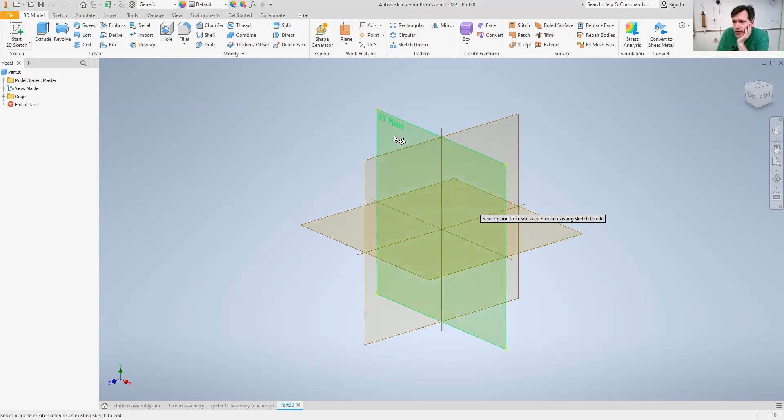All right, so you're going to have, we're just going to do the side walls of this part. Actually, no, let's just do one side for now. Let's do one side, and then I'll make another one for front sides.

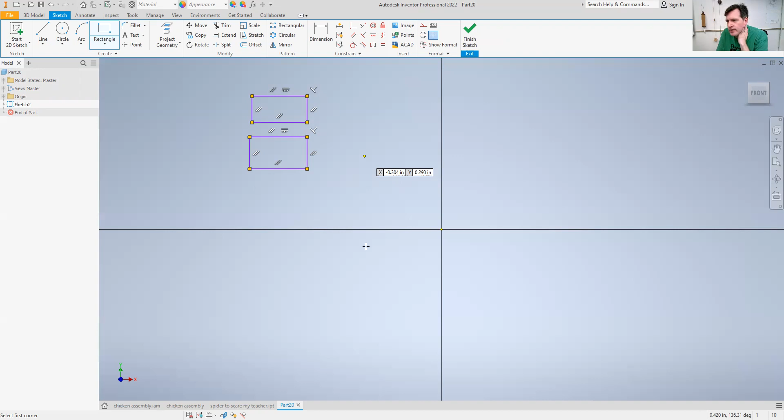Little hinges that are going to attach to little spots for hinges right there.

So what we're going to make first is this piece right here, which incidentally is also this piece right here. You'll have to make two of them if you want a different design on each one, but if you want just one design, you just make one.

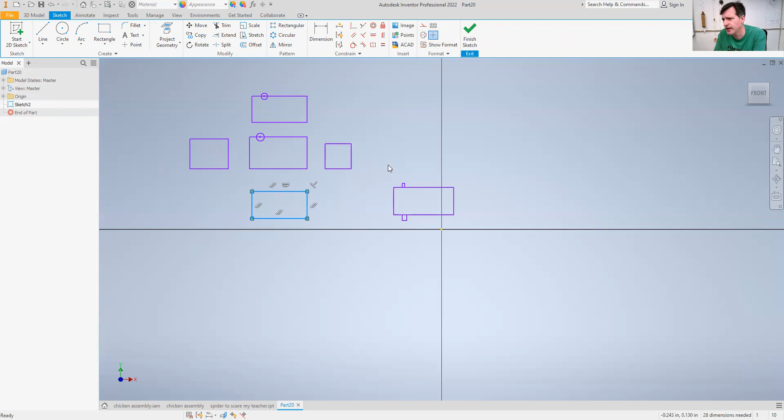And then we'll make another video for this one here and this one here, and another video for this, and another video for this. All right, so making this video first.

Get rid of these. First thing we're going to have to do on all of these parts is make a rectangle that is 4 inches by 3 inches. Regardless of the part you are making, you need to make this rectangle first. Now, it doesn't need to stay a rectangle. In fact, it'll probably be easier if it doesn't.

I go through and delete two of the walls. That's fine. What this does is makes it so that when I export it through Adobe Illustrator, it keeps the sizes because I can't translate it directly. We need to keep that. So the size of the wall here is going to be 3 inches by 2 inches.

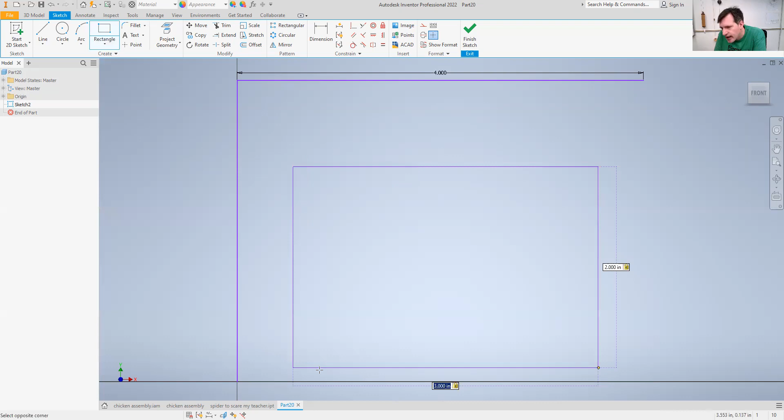This size is chosen because it's the largest size box that I can fit on one piece. Now, I notice it's getting a little low here. Probably fine, I'll just move it a little bit closer.

Everything in your drawing needs to be within here or it'll mess up the scaling of your part. So even if it's just a drawing, like some GIF or JPEG that you're tracing, it needs to stay within this box area, or else it'll mess up the scaling and then things won't fit.

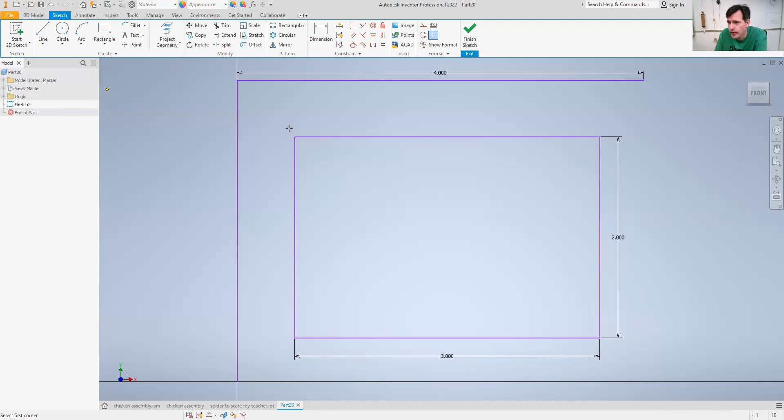For this one, I am going to make a little tab here. This little tab can be 1/8 deep. Oh, I didn't mean to. So let's put in a dimension, 1/4 of an inch long. And I'm going to have a notch here, and then another tab.

These tabs and notches are called finger joints, because when they go together, it is like fingers meshing with each other. They are also called box joints, which is convenient because we are using them to make a box.

Now, that's how big we want them to actually be in real life. However, the laser is going to cut out a little bit. And if we cut out the little fingers just like this, they're not going to work. They're going to be too loose. The box is going to fall apart.

You could glue it together, but that'll look messy. And we don't have to, because we can just prep. I have run some tests and I know how much the laser takes out. The amount the wood laser takes out, incidentally, is called kerf. We have to calculate the kerf. The kerf is 1/80th of an inch.

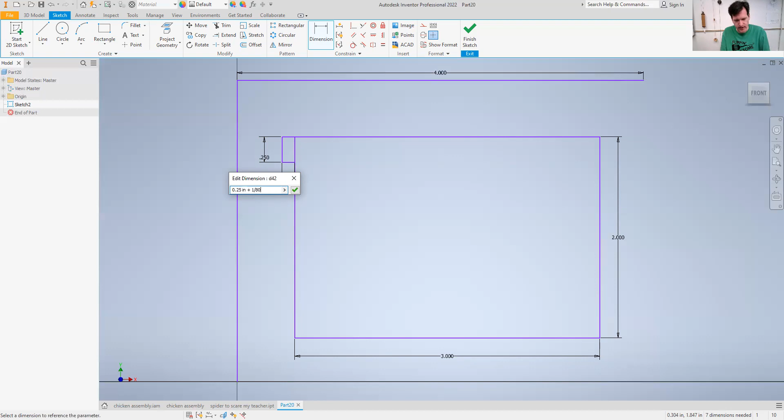So for these that need to be a little bit larger, I am going to do plus 1/80, maybe get a little bit bigger. And this is going to be 1/8 of an inch plus 1/80. Note this is 1/8 of an inch because the thickness of the wood is 1/8 of an inch, 1/8 inch plywood, so it lines up with the edge.

I'm going to put an extra 1/80th of an inch so that this lines up with a 1/4 inch hole. I'm putting in an extra 1/80th of an inch. And then I am going to duplicate it with a rectangular pattern.

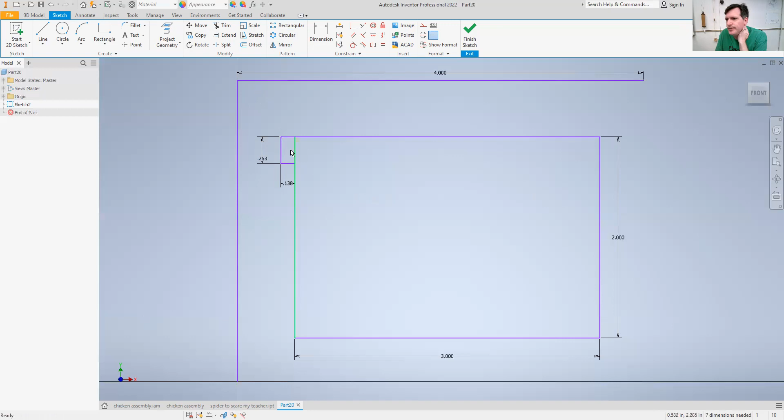I'm going to cancel here because I don't want to do that third or fourth side. I'll just click, click, click. I'm going to select a dimension, and I don't want it to go up, I want it to go down. I want 4 of them, and between the start of this one and the start of the next one, I want it to be 1/2 inch, because they're 1/4 inch fingers. So 1/2 inch. And if I hit OK, it's not going to work.

I'll show you why, then I'm going to redo it. I'm going to try to trim out, and I can totally trim there—well, except for that, it's part of a box. I try to trim there and nothing happens. And if you remember from your very first Inventor assignment, there's something more I've got to do. Try it again.

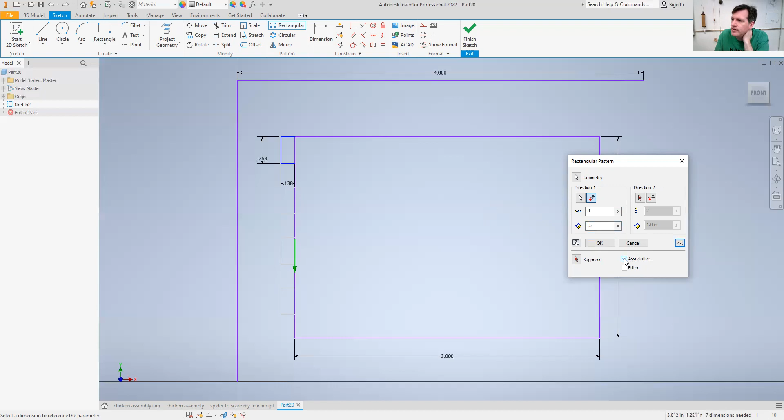Exact same, we got 4, we got 1/2 inch. I'm going to go to these here and remove associative, because it's a feature, not a bug, why it doesn't let me trim. Trim, trim, trim. It's probably still going to complain. Yeah, so 8, I think it is.

I'm just going to draw back in. All right, there we go. And I can do it on the other side. I could also use a mirror if I wanted to, but I'm not going to because it's not that much. So it's 1/8 of an inch plus 1/80th of an inch. And I still forgot this side. So it is exactly that because it lined up with that one, I believe.

I'll just type it in just to make sure—1/4 plus 1/80th. And hey, it doesn't change at all, because it was lined up with that one.

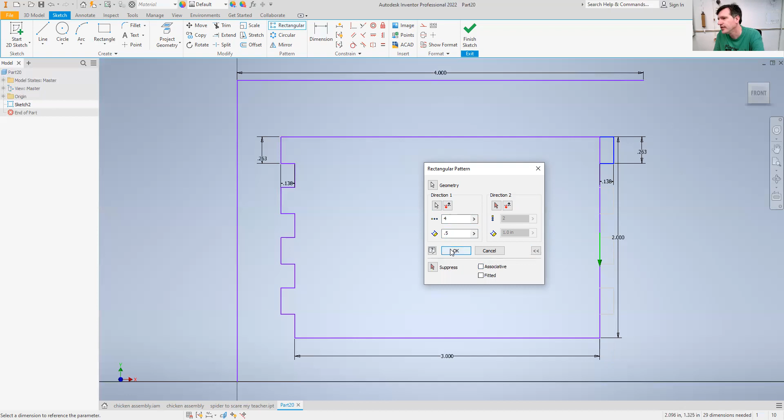And then we do the rectangular pattern again. We say this one, this one, this one, we pick that, we do 4. I don't even need to change the direction because it's already going down. We go to .5. We don't forget associative.

We trim what we can trim, get rid of the lines that are going to cause us grief. We just draw that one back in. Now, at this point, there's no difference from a long box and a short one.

I actually know I'm going to do one thing more. We're going to have to put a base in eventually, and we're going to have to put holes so the base fits—these are going to be a different kind of joint. I believe this other joint that we're going to have is called a pin joint or a tenon joint. Tenon joint—look that up.

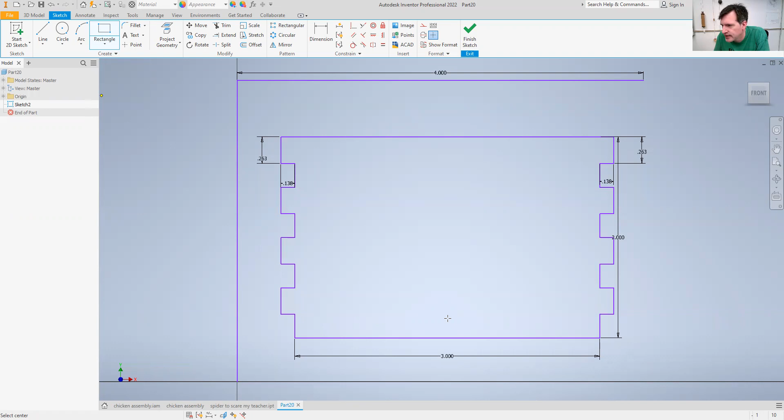All right, so the hole for it is going to be here. We're going to make the pins in the base. I'm going to change this to a center point rectangle. I'm going to put it randomly there so it's not lining up with anything. And I'm going to actually position this first after I size it. This one I'm going to want to have at exactly a quarter of an inch.

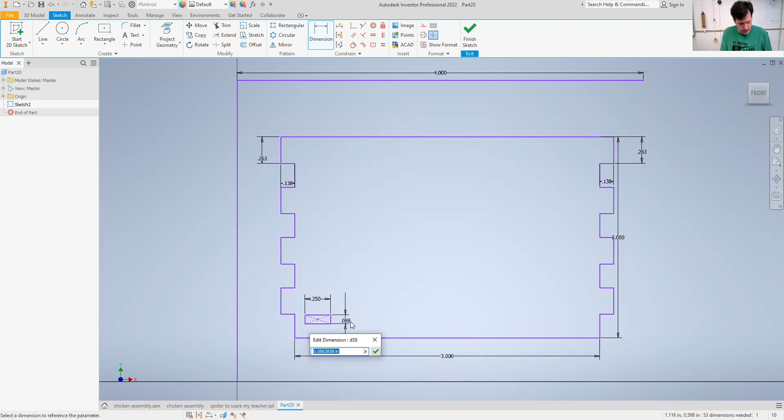Exactly an eighth of an inch. And I want to put the distance between here and here at 1/8. This is between here and here, 1/8. It doesn't matter, you can have it at a different position, it just needs to be consistent. And I need to make sure weird things didn't happen, because it looks like they did.

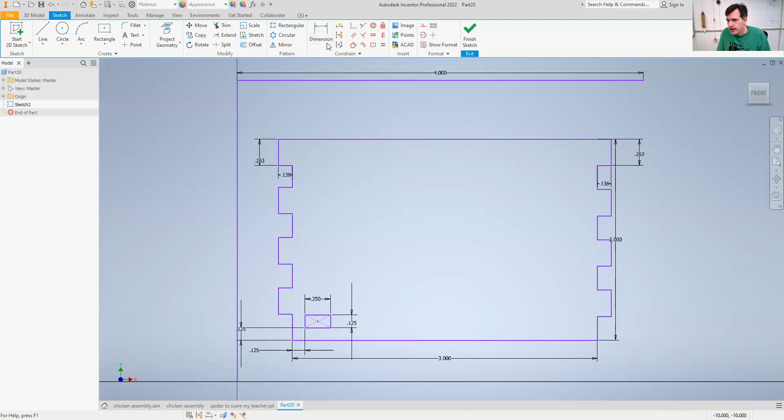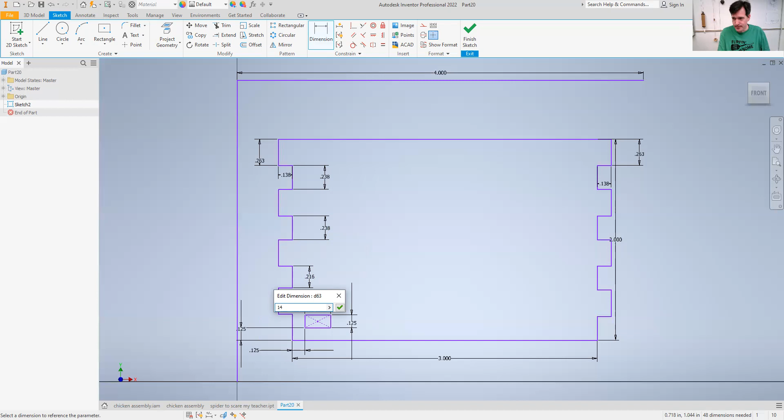Here, that is not the right size. It should be 1/4 minus 1/80th. And should this be 1/4 minus 1/80th? And should this be 1/4 minus 1/80th?

And should this one—which it looks like it is now—just make sure these ones on the other side didn't get messed up too. It should be the same. All right, there we go. It is positioned and it didn't mess up our finger joints, or we fix it.

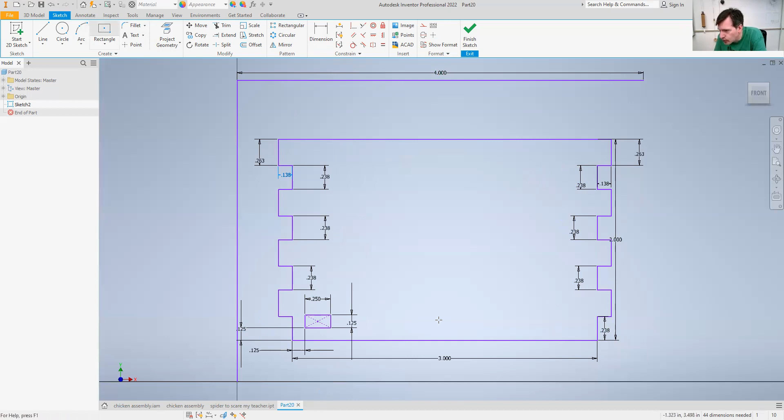And I'm going to need one that is in the center. Line it up with the center point there, and the center point there. And this should be in the right spot.

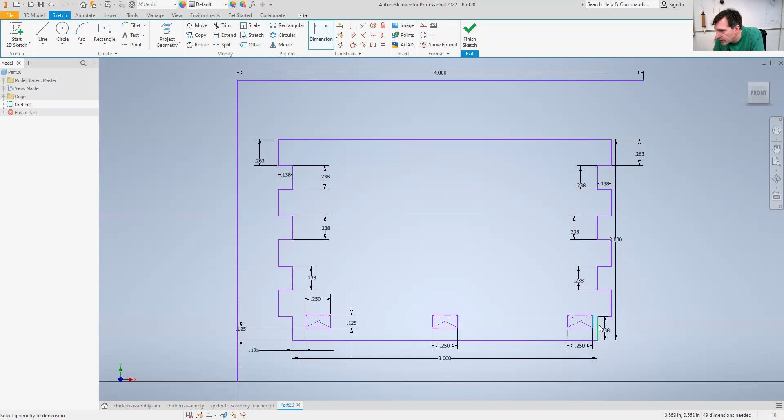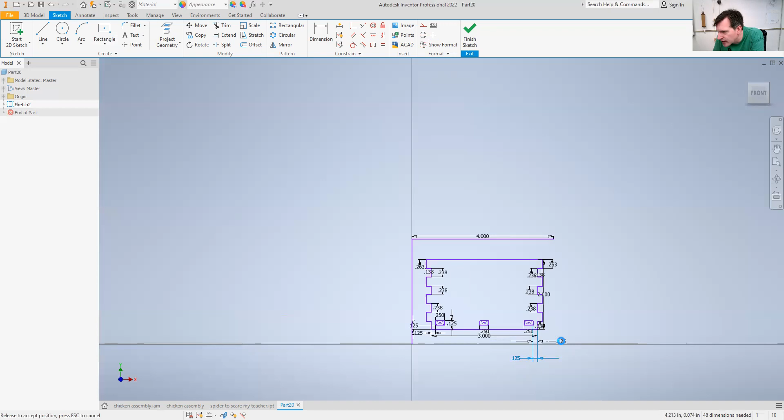Now, dimensions can technically be outside that range, but I'm going to move it back in just to make sure I'm careful and nothing is outside this box here. So now we get to figure out the difference between the length and width.

I am going to make a box which is 1/8 of an inch by 1/8 of an inch, which is going to be for a pin hinge, basically. It's going to line up at the top. Let's go, it's going to start from here, but it's going to go over 1/8 of an inch. It's going to line up with this hole right here.

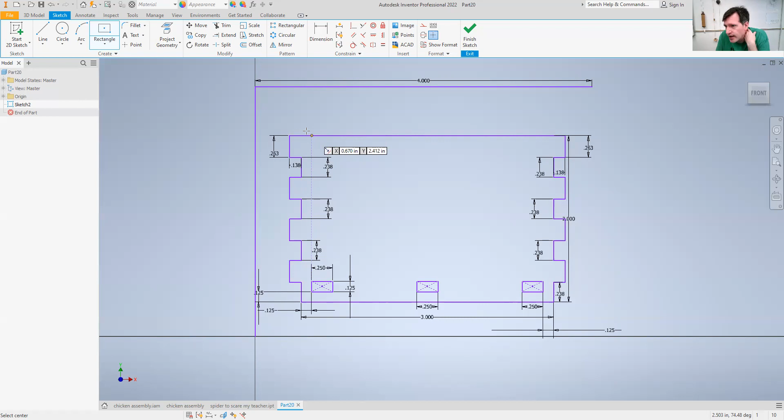I did not want center point one. Let's go and try that again, except for that center point. Lines up at the top, lines up with that hole. And it's going to be 1/8, 1/8. That's the size of the pin hinge that we're going to make.

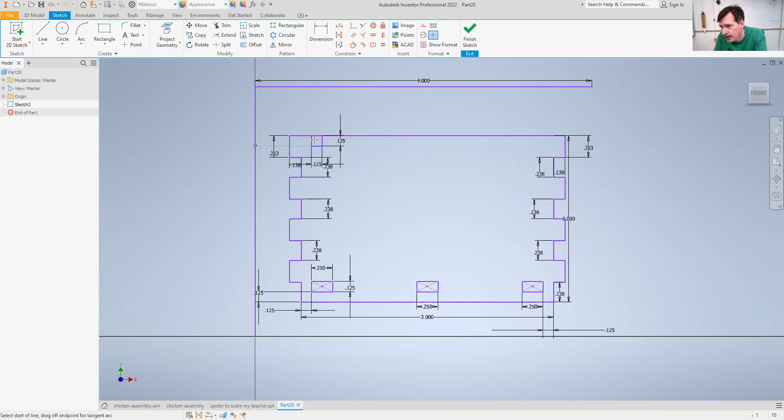Actually, we could have gone with center, anyway. I'm going to erase this one anyway, so I'm just going to put some cross lines in there to find the center. Those of you who have had geometry, that is a postulate where you put diagonals on any rectangle and you'll find the center of the rectangle.

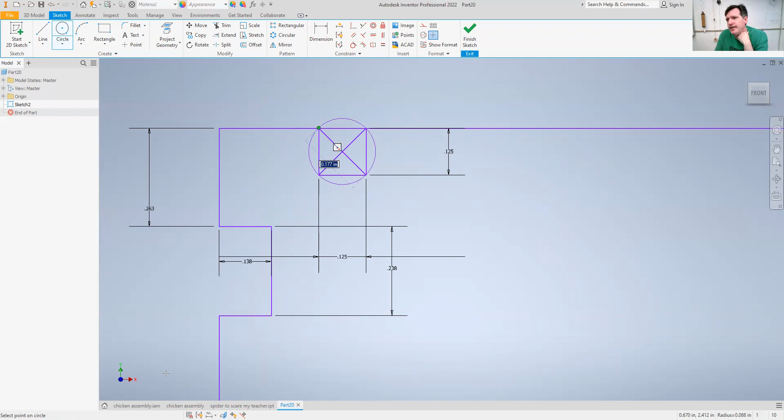I'm going to make a circle that encompasses that, because that's going to be the hinge. It's going to be a little bit loose because this hole is drawn exactly, and again it's going to be an 1/80th of an inch bigger. So there's that. This is going to be the hole for the hinge, and then I need to make another one that is larger so that it gets there.

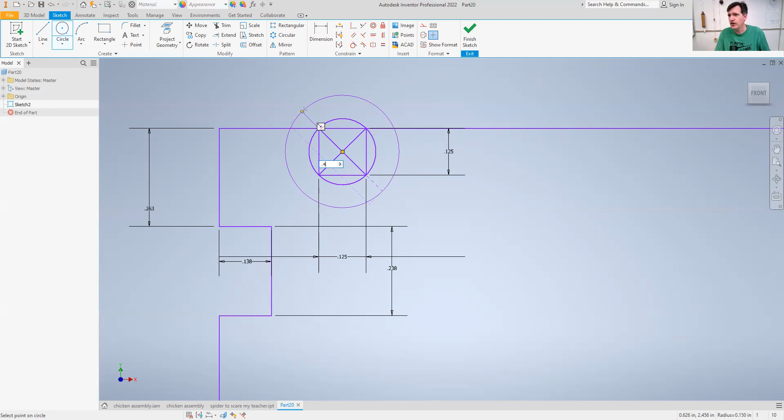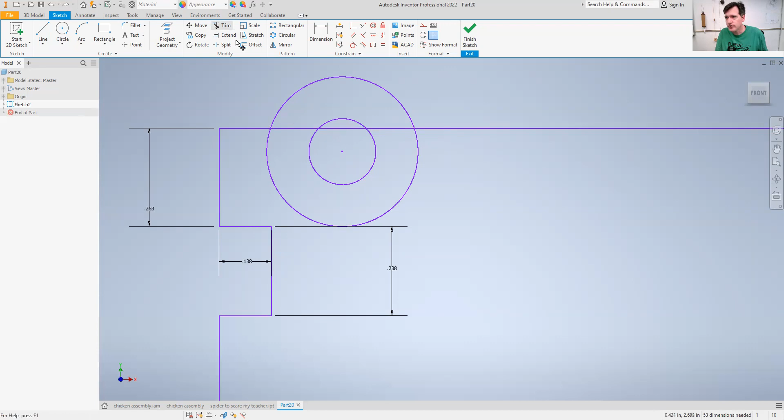Let's just do 0.4. Doesn't hurt if the hinge is a little big. And then I'm going to go in and delete those. I'm going to delete that. And I'm going to trim too much. Trim there, trim there, trim there, trim there.

There we are. There is a hole and some wood to enclose the hole, and the center of the hole is going to be, let's try that from this edge. That should be an exact value. Let's try it with the dimension tool. There we are. That's totally an exact dimension.

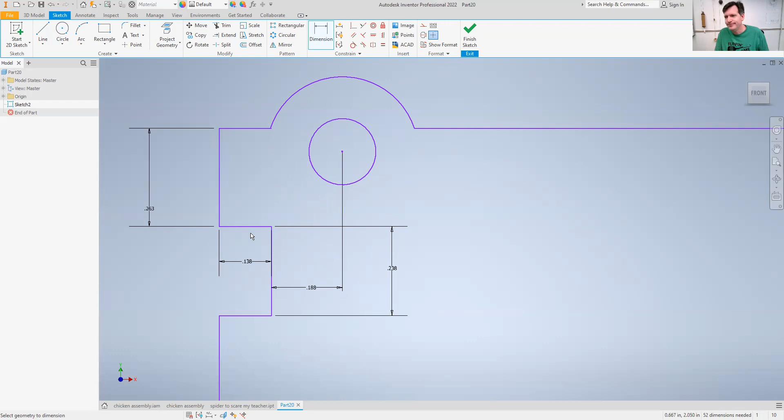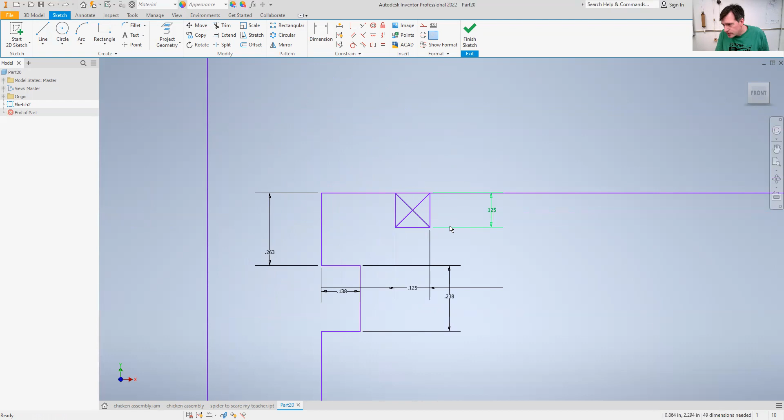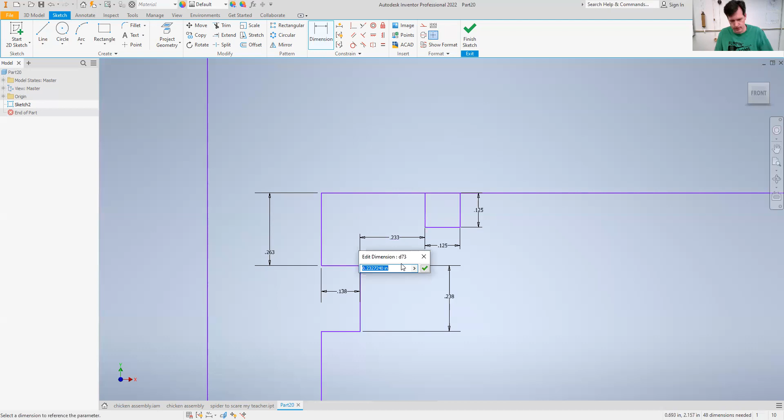I'm gonna redraw this thing at 1/4 of an inch in, which I know. Why am I redrawing it? Because I should. Let's go, again, it's going to be 1/8 by 1/8. And let's go 1/4 of an inch. I hope it doesn't, I didn't do anything weird.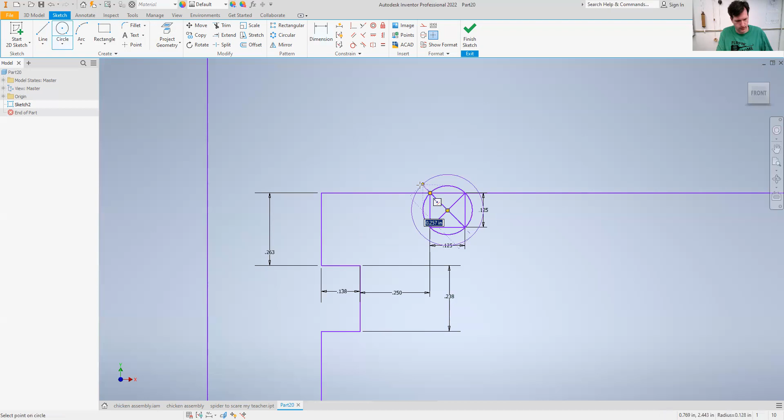Then we'll just do that again. In there, circle, the edge, circle, .4, and trim. Not going to really want me to.

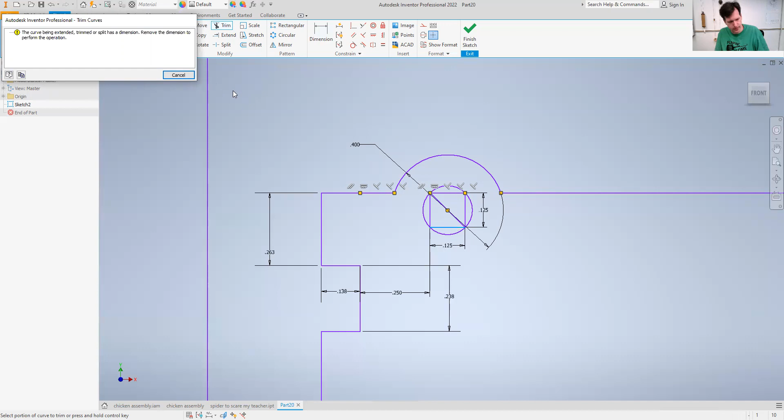So this is part of the box. You can't trim that. Sure, I can't trim that, but I can hit the delete button. There we go. And 1/4 of an inch, it'll make it a little bit better. All right, so there it is.

That is the center of, or the side of the box, if you have a long lid. The next video I will do is, well, if you pick the long ones, the next one will be the front and back. If reviewing these chronologically, it's going to be if you have a wide lid.

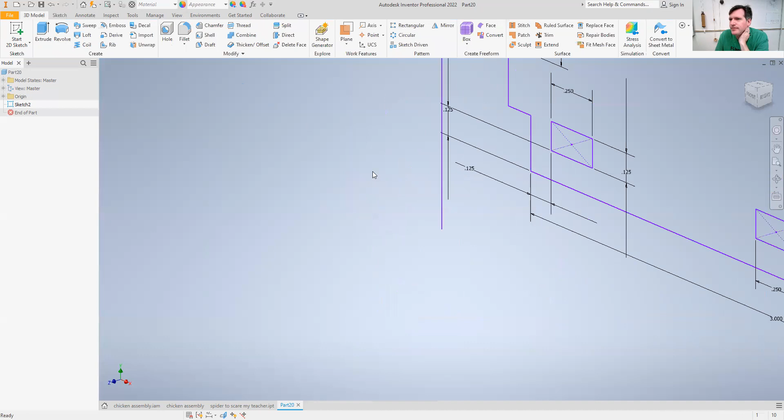All right, so I'm going to stop this recording and, oh actually, hold on, there's one last thing. In a sketch, extrude this here, 1/8 inch, because we do have to assemble this sketch. Also, if you're going to do any design, do it on this original sketch because I am going to be exporting these sketches. If it doesn't make it into the extrusion, that is fine.

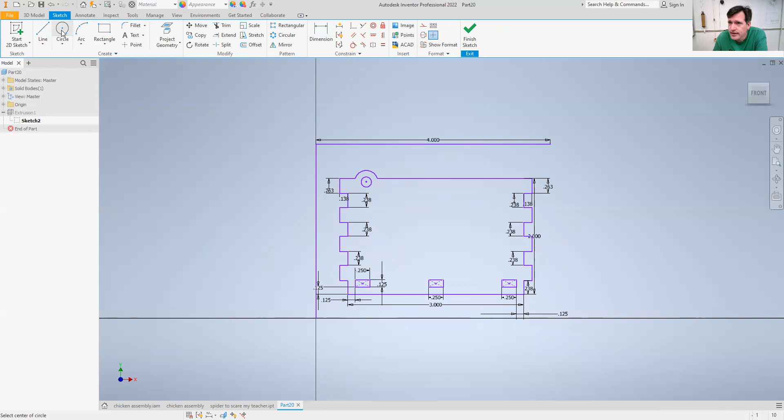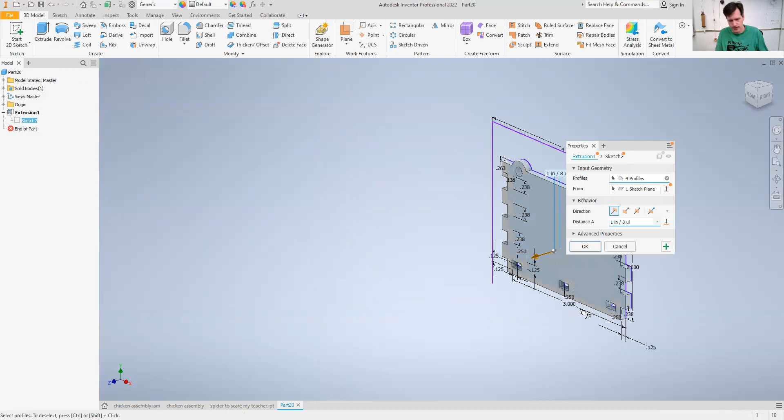I can make a very simple sketch here. Here is, this box is happy to see you. There we go, we keep it there. If you wanted to include it as part of your extrusion, you certainly could. That's fine, but it's not necessary. As long as the sketch exists there, it is fine.

And if the lines don't line up so it can extrude, that's fine as long as the outside one does. All right, on to the next video.